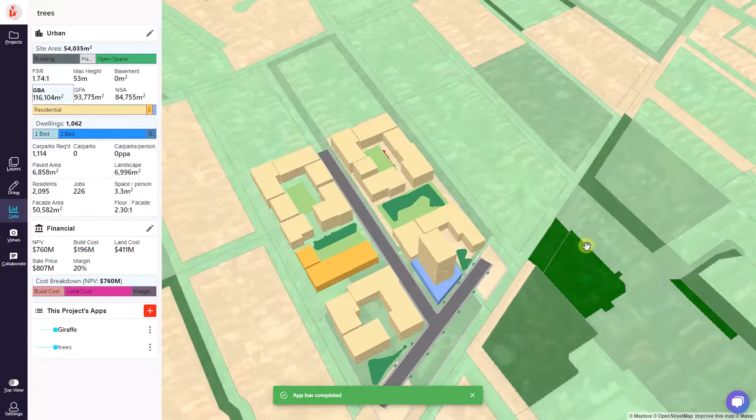So 10% coverage is below what the Greater Sydney Commission is aiming for, which is 40% canopy cover in Sydney. The reason's obvious—trees are just so good. They make oxygen, they improve mental health, they control the urban heat island effect, they reduce stormwater runoff, they grow quietly. They're highly correlated with increased property prices, so more trees is better.

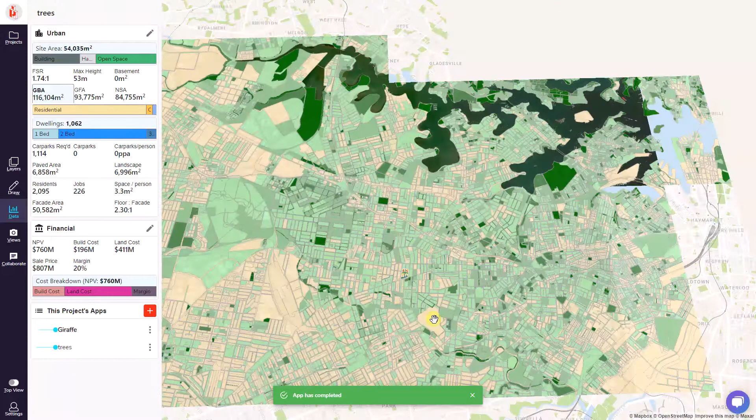We found this layer in Giraffe, this green layer, which is actually an awesome layer that shows the percentage of canopy cover in Sydney. If you have a Giraffe account, you can access this layer. It's really, really detailed—you can see the North Shore has canopy cover everywhere, while other parts of the city have much reduced canopy cover.

So what we're going to do in this video is get our 10% cover for our development up. The baseline is 53 trees, 10% coverage, and let's show you how the app works and how we can increase that canopy cover.

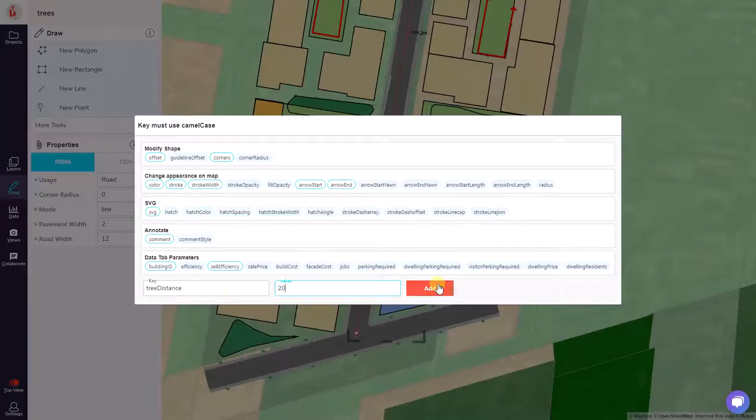The first thing we can do is add a key to a Giraffe geometry called tree distance, and if we set that to 20, that'll add a tree every 20 meters on this road, increasing the number of trees.

The other way we can add trees is just by adding them onto lines. This line here has a tree distance of 15, so this red line I'm moving around will have a tree every 15 meters along it. If you're designing, you can do something like this and get a row of trees coming down here and then down there, which is kind of good.

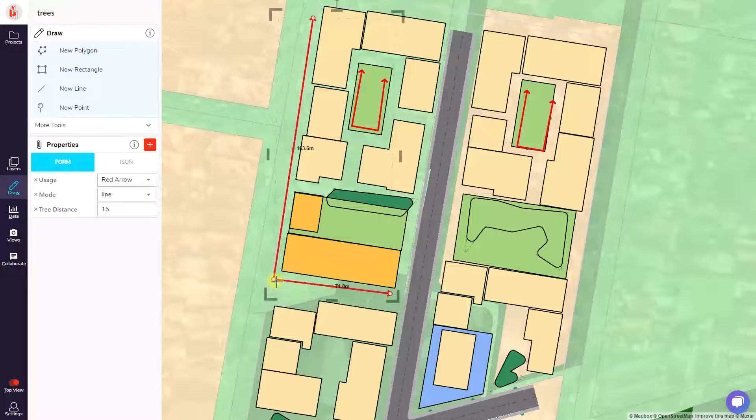Let's bring this row of trees all the way down there, and then copy this thing again to make another row of trees over here. This is great for a designer—normally you're sitting there placing trees one by one, copy paste, copy paste, copy paste.

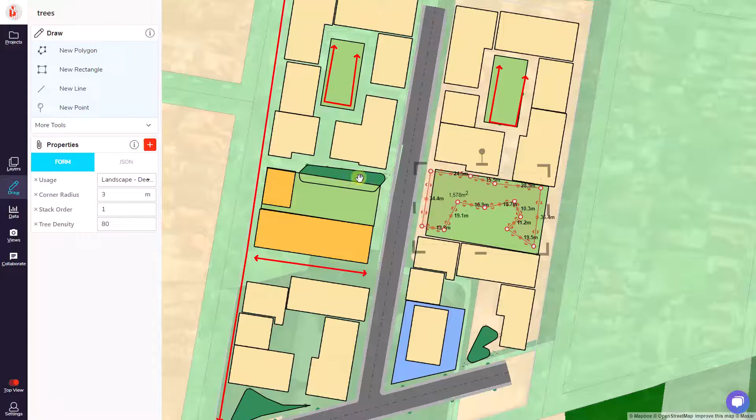The other way you can add trees with this app is with the tree density, currently set to 80, so every 80 square meters Giraffe tries to put a tree. Let's extend that out—we won't go into the building, but let's go a bit further. Every 80 square meters there's a tree.

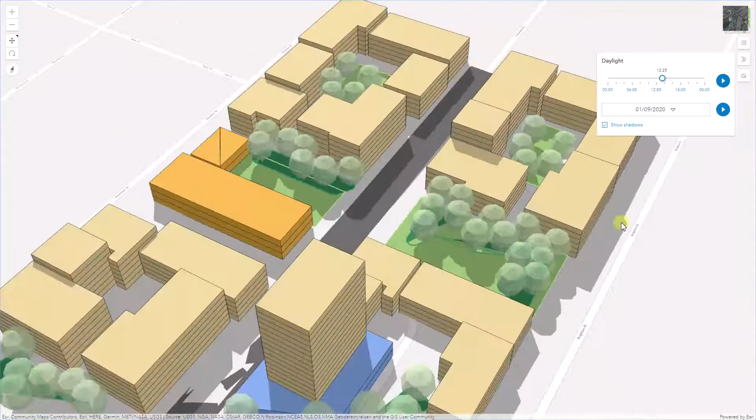With those couple of adjustments, let's rerun the app. While we're doing that, we'll look at the 3D view in Giraffe—you can see the trees on the deep planting there and on those little courtyards, which are looking kind of good, but this main street certainly is a bit bare.

It looks like the app's completed. We've doubled the amount of trees, we've doubled the amount of coverage, and if we go back to the 3D view and refresh it, we'll get a feeling of how many more trees we've made.

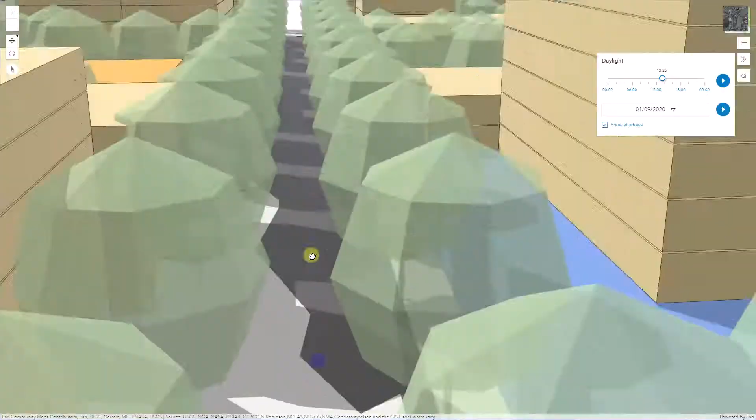Putting trees on this street, I think, is very successful. These trees aren't the most beautiful geometries you've ever seen, but they're sort of transparent and they tell a story, and this move of siding the development with an avenue is working really well.

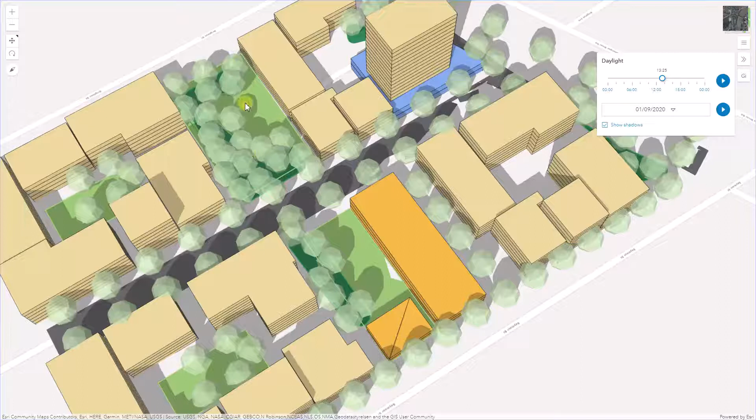I think these heavily treed parks also work quite nicely. I'm thinking of these trees as describing really nice little lawns that front this north facade—I'm imagining a lot of activity on them here, and I can even show the winter sun.

Let's check that out. In June—June 21st, to be precise—you can see there's sun here, so I'm imagining people sitting here, maybe cafes there in winter, still catching some sun.

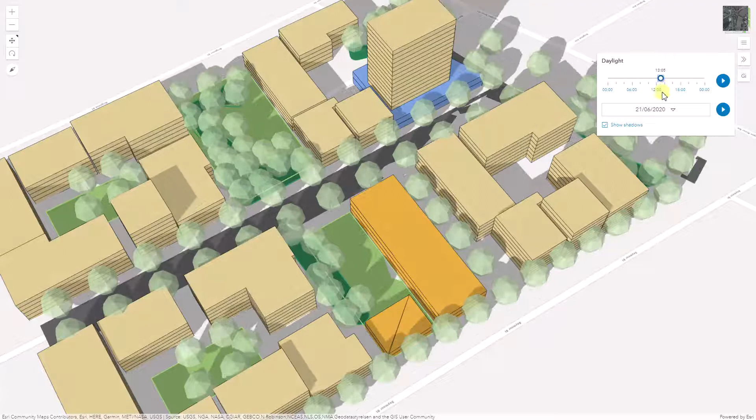These trees could be deciduous as well, so if they lose their leaves, there'll be a lot of sunlight coming through the branches rather than this fully shaded experience that's being rendered here at the moment.

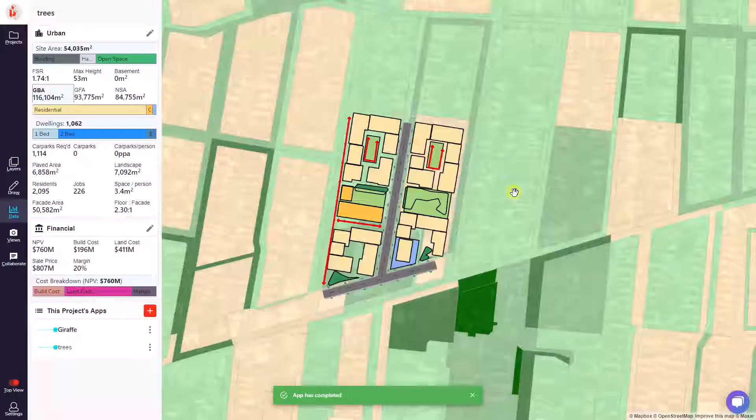The other thing the app shows is the amount of pollutant, the coverage, and cost to plant. We can edit that—it's a little bit involved, but if it costs $10,000 per tree to plant, and say $120 a year to maintain these trees...

...we can rerun the app with those updated figures and get those calculations done. Otherwise, you've got the raw data there, so you can do any maths you need.

There we go, let's check the updated report. All right, now we're in the millions to plant and 12 grand annually to maintain.

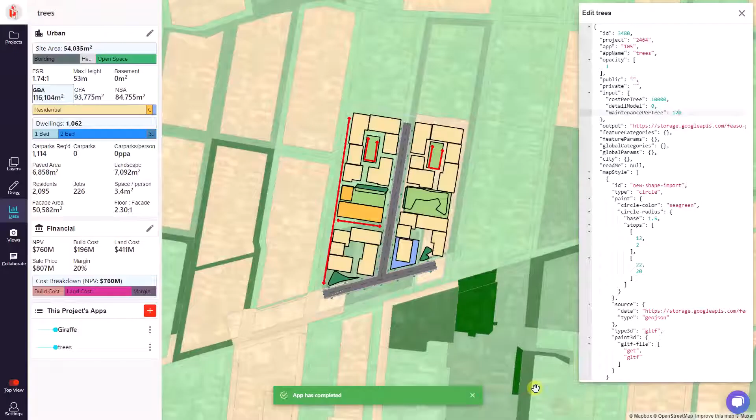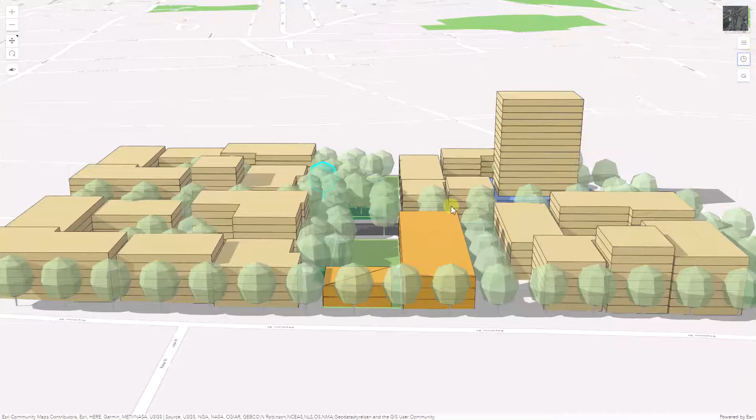This is a great thing to consider at the feasibility stage of a project. Firstly because it affects your feasibility with the cash, but secondly because you can start telling a story with these trees—even with these simple renders, it just looks so much nicer. This development is so much more palatable, and your imagination works so much better on what it could be like.

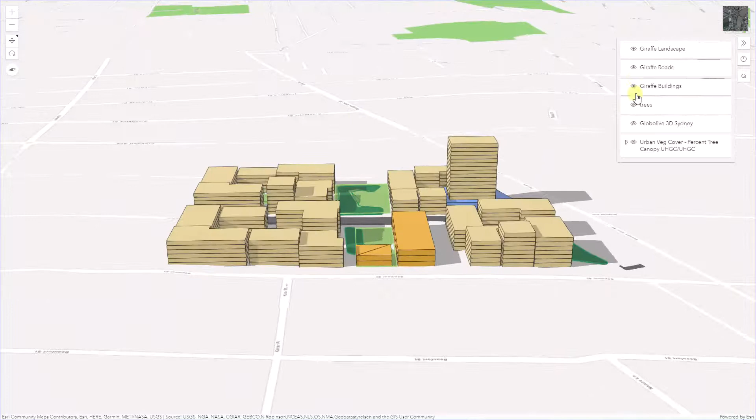If I just turn them off, it feels naked, doesn't it? It doesn't feel good at all. The human psyche's response to trees is just incredible—I think a 30% increase in tree canopy cover reduces mental illness by 30%.

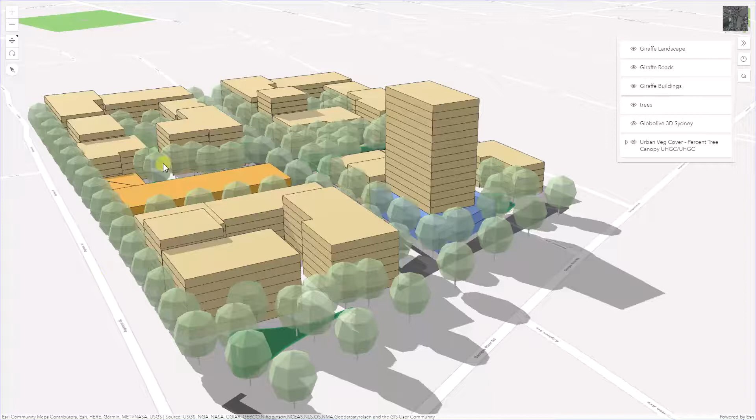There's something really deep in us that responds to trees, so getting them in early to a feasibility, especially at this scale, is just going to smooth the passage of this thing and make it far more attractive. Then of course you have the numbers as well.